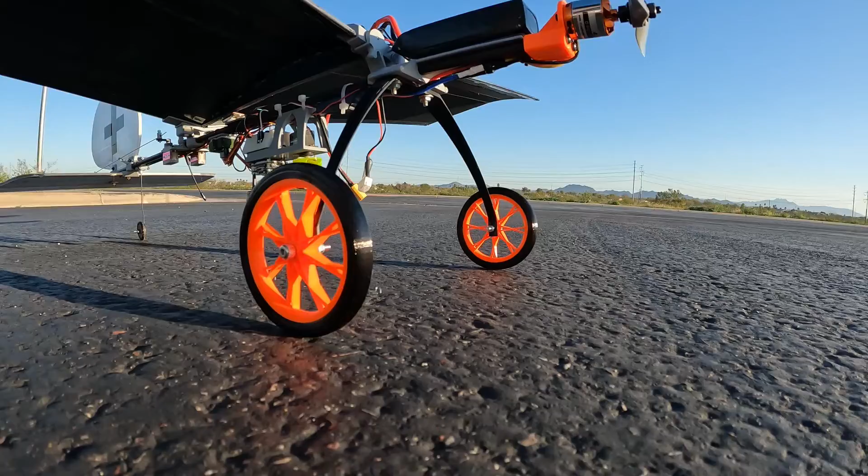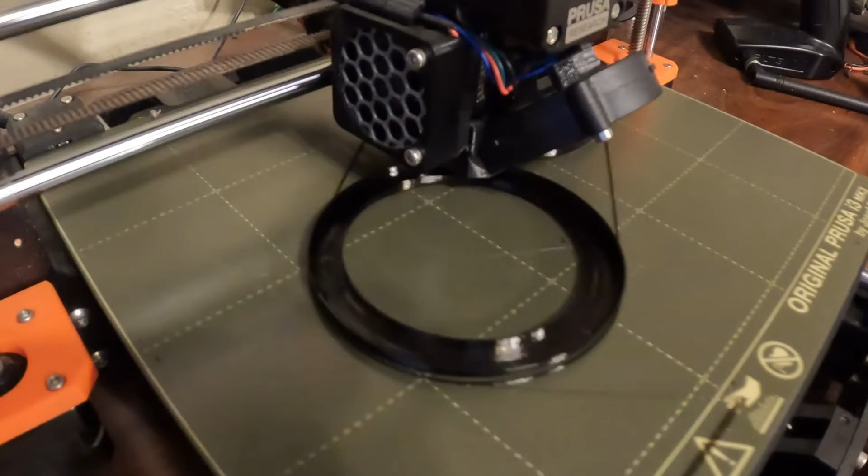Hello, David here. Today I'm going to show you how I designed and printed these wheels that I use on the slow sticks. These are new ones. They're 90 millimeters in diameter, and this time I wanted to try some PETG, but I've been very happy with them in PLA, so you can print them in either one.

They're very durable, pretty light. So stick around as I show you through the steps in Tinkercad.

Okay, starting from Tinkercad.com, we can go in and do some design work. This is in no way sponsored by Tinkercad. It's just simply one of the tools that I really enjoy using in development for a lot of the 3D printed parts. It's very quick. I can do up shapes and 3D print them from the STL files that are generated here.

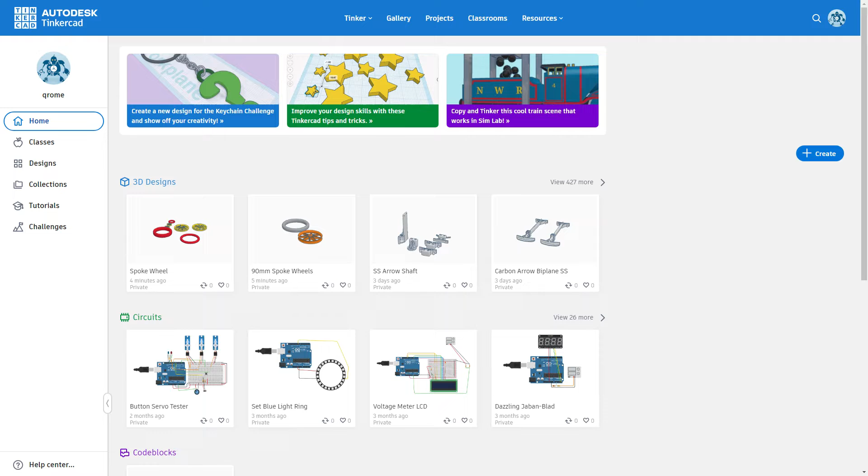And so today we're going to go under your designs, but we're going to create a new 3D design. And we will create a wheel and a tire that can be printed and used on an RC airplane.

I'm going to assume that you're fairly familiar with some of the locations of most of the stuff, and sorry if I jump to conclusions that you may already know. However, you can spend a little bit of time in here and get to know the shapes and what they are and what they do and some of their configurations.

So right here you start off with the basic shapes, and these have most of the shapes that you're going to use, and the basic concept in Tinkercad is you create a shape and you can add and subtract from it. So one of the first things we're going to do to create this wheel, we're going to start with a cylinder.

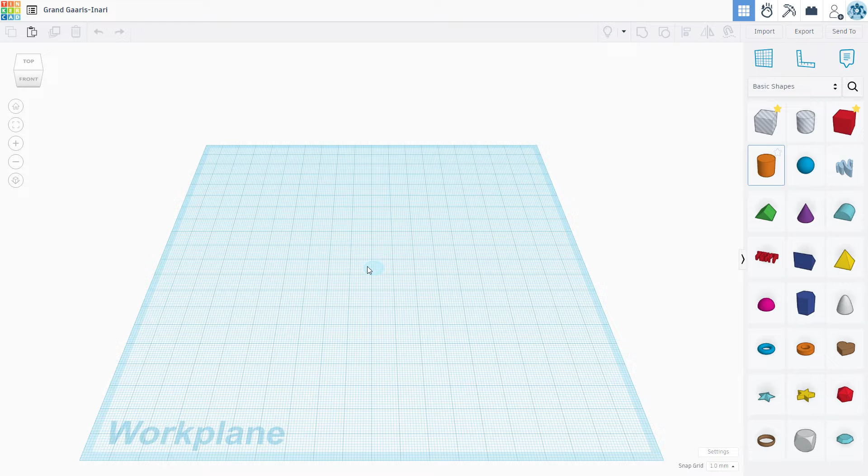I'm going to smooth out the cylinder by increasing the number of sides to the max. And then the other item I'm going to do is I'm going to add a little bevel to the top of the hub. Maybe we'll just type in here, make it 2.

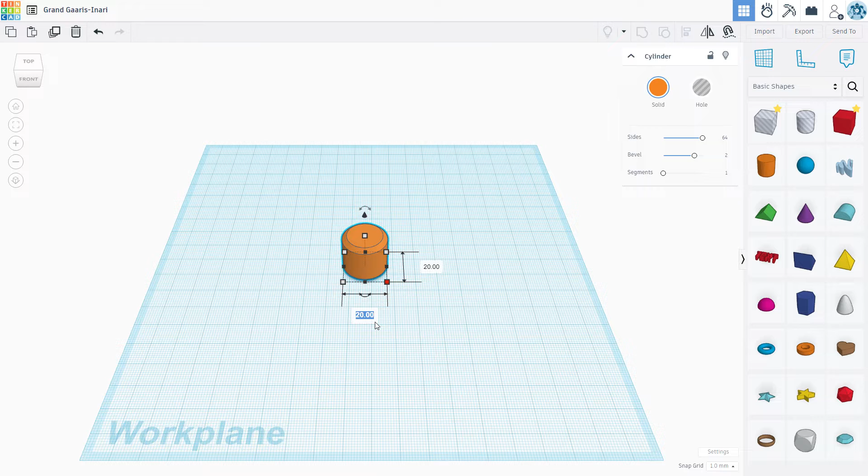And let's go ahead and make this hub maybe 20 millimeter by 20 millimeter. That'll give us a 20 millimeter hub.

That bevels it also on the bottom. And I don't want the bevel to be on the back side, and I also don't want it to be this high. We're going to cut that bottom part off above.

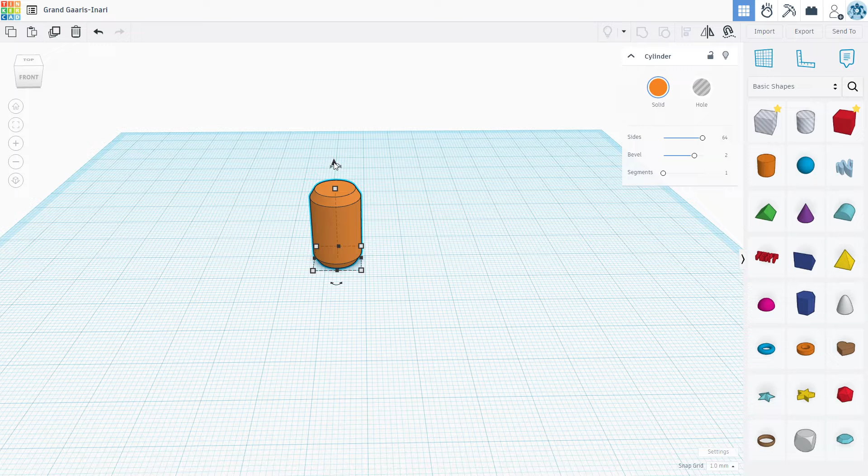So this little cone icon, and if you notice, we know that the part is 20 millimeters high, so if I put 10 millimeters below the floor, we'll use that as a guide to cut.

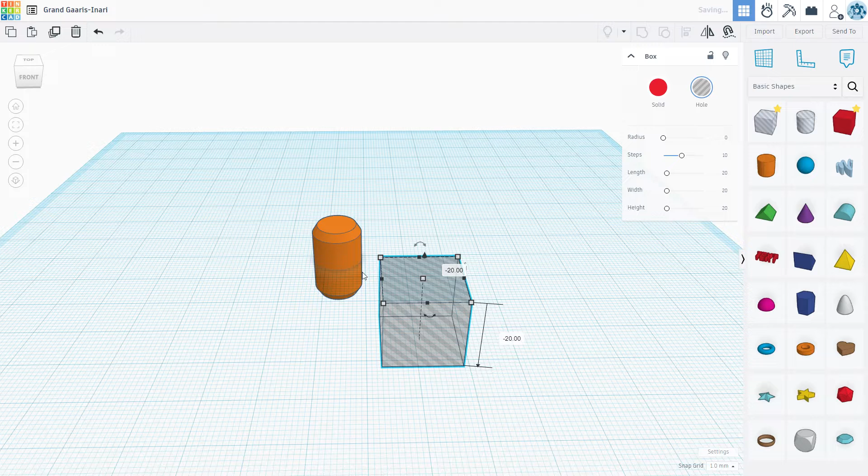And to cut that bottom part off now, I'm going to take the subtraction cube, I'm going to lower it below 20 millimeters, it's below the floor right there. And I can just set this underneath, and you notice that it encapsulates the entire bottom part of that.

And to cut that off now, I'm just going to highlight both of those parts, and you'll see right here shapes, there's a number 2 up here selected, and then I can do a join or group, and that's going to subtract the clear part from the solid part.

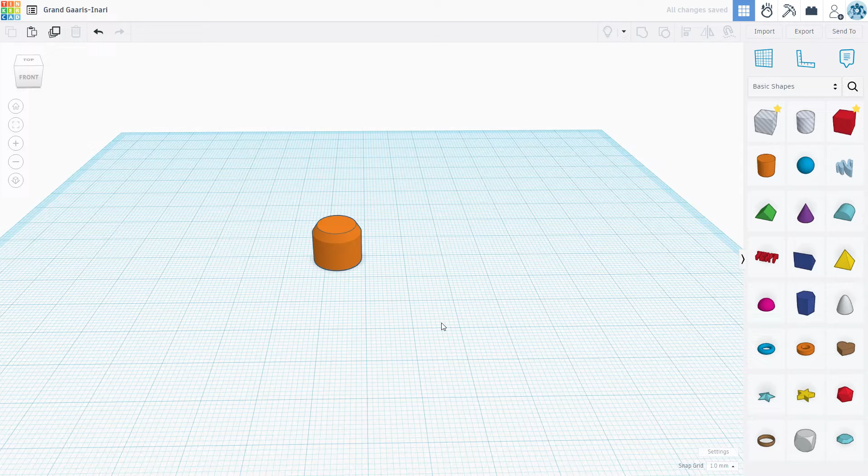So there's our hub. We need now to add an axle hole, and often I've learned that in the design I want to do, if I want a 3 millimeter axle, I need to add a 0.2 millimeter kerf or space to allow the axle to pass through.

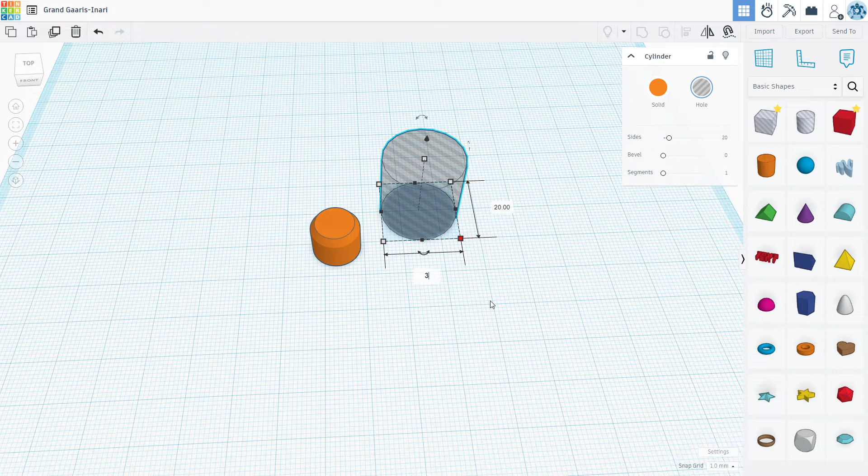Otherwise they will just be too tight. So I'm going to do 3.2 millimeter, and we need to also do the other side. And we can increase the sides as well to make it more round.

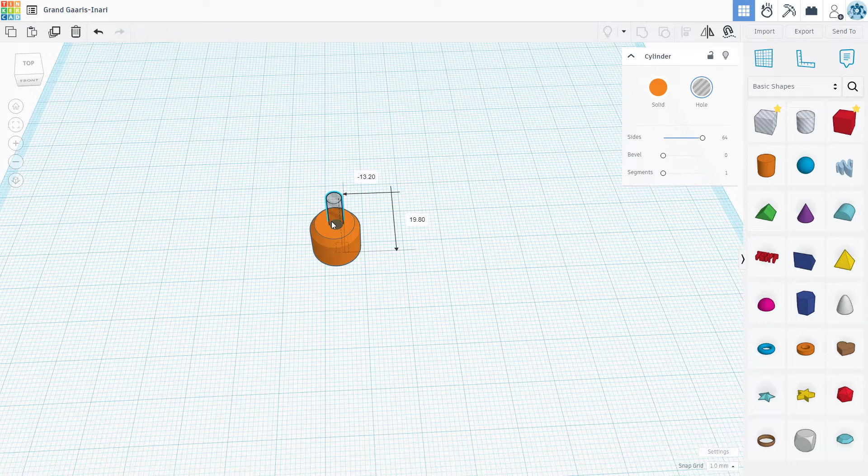Okay, at this point, one of the difficult parts in the design process is how do I make sure that I get this axle dead center. I can try to guess and move it around and spend a lot of time and try to do some math. But let me just show you, this saved me a lot of time and a lot of headache.

Is you simply just highlight, select the parts that you want to align with each other, and you notice here you've got two shapes selected. This right here is the align tool. So I'm going to select it, and it's automatically going to give us some indicators of what and how we can align this. And you can just start aligning it right now.

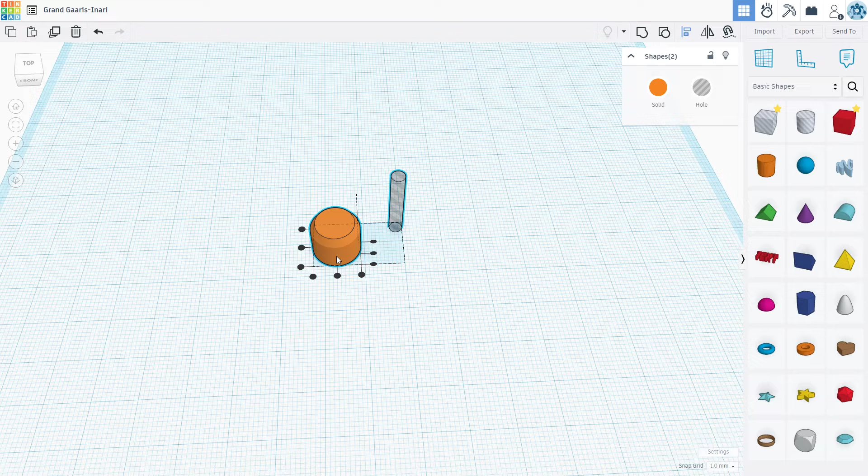However, I want this piece to stay stationary, and there's usually times where you don't want one piece to move or the other piece to move. Now I can align in this axis, X and Y, and you can also align in the Z axis as well.

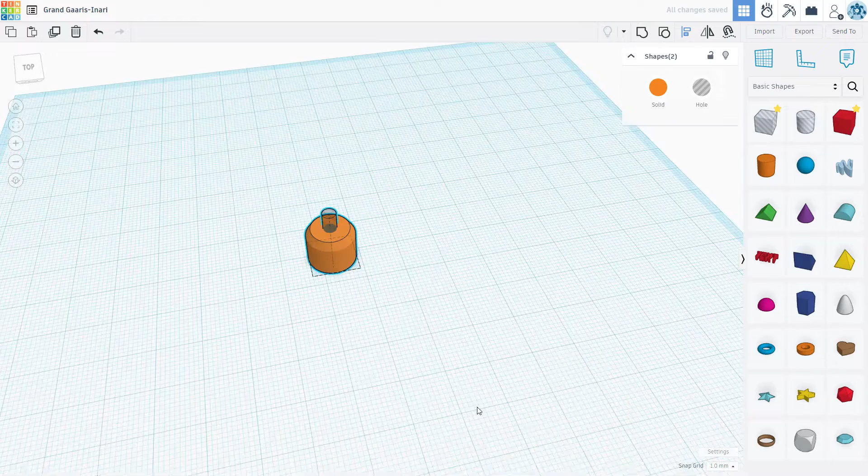So now if we look at this, we've got that axle hole perfectly centered. I'm going to leave them like this, but they are aligned.

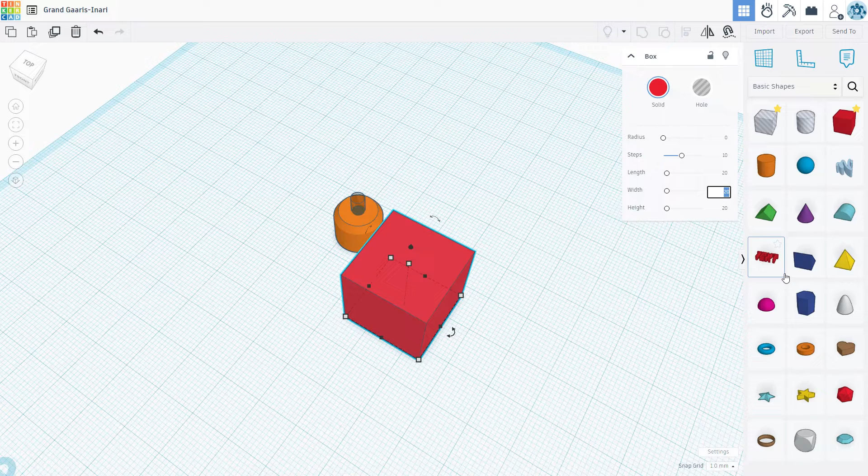Now the next thing I would do is let's add some spokes to this, and there's several ways you can pick from your shapes over here. You can get creative. So from here, I just dragged out a cube, and these cubes default to 20 by 20 by 20.

But we're going to make it 0.8 millimeters wide. That's on my printer - 0.8 would give you 2 passes, that's 2 wall thick. We know the hub is 1 centimeter high, 10 millimeters, so let's adjust the spokes to be about that same.

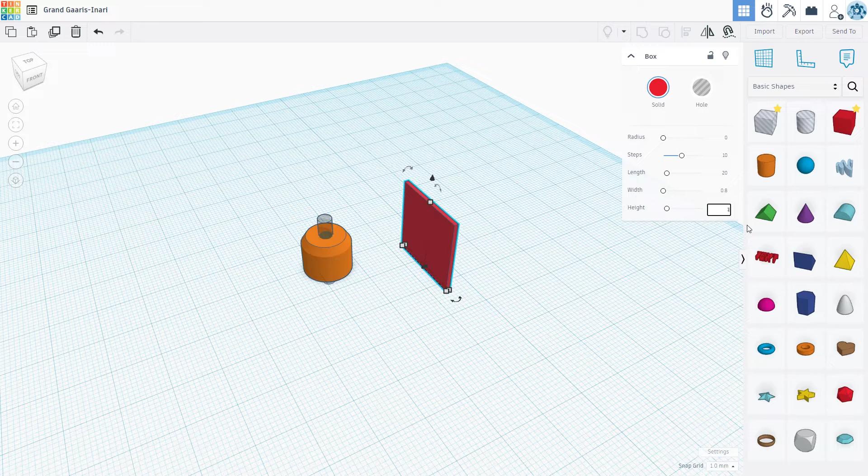Let's do the length of it, 35. Some of this will get trimmed, and that's fine.

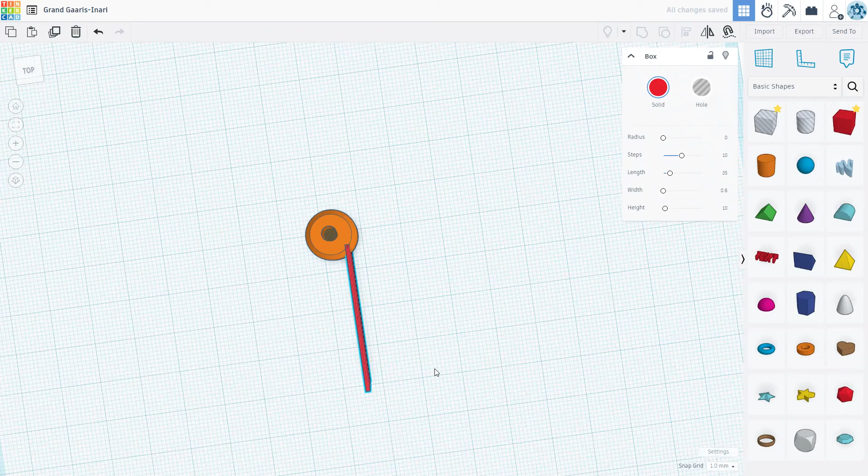I'm going to lay this in here, and it's off-centered. We'll go over that a little bit, but you'll see why in a second. One of the things I pay attention to is that all the corners are dug in - there's nothing poking out in the bevel. That looks pretty good.

That's great. One of the other tools here, so I've created one spoke. Up here on the left, there's a duplicate or repeat, and so I'm going to duplicate another spoke, and it lays it immediately over it, and it highlights it, and it's ready to move.

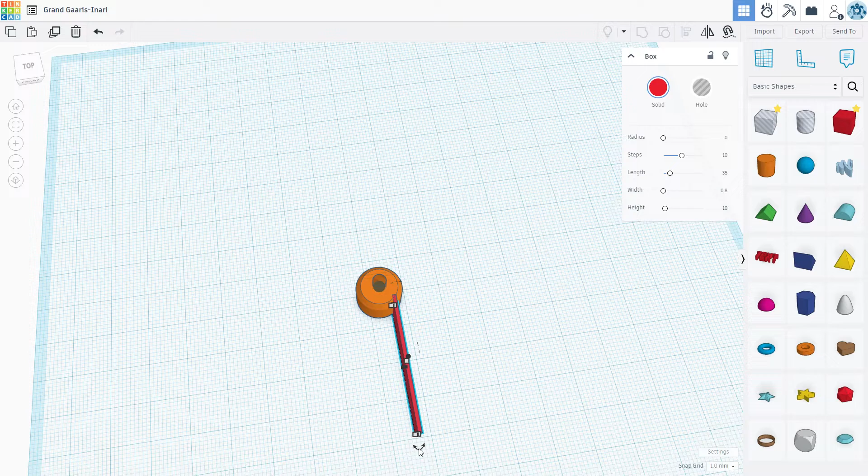And I'm going to just go ahead and rotate this. Let's go rotate it. I think the corners are each in. Okay.

So there we go, we got the spokes. Now we need to duplicate these.

What I typically do is I highlight each one. I'm holding down Shift, and I'm clicking on each one. So now we know we have 2 shapes selected.

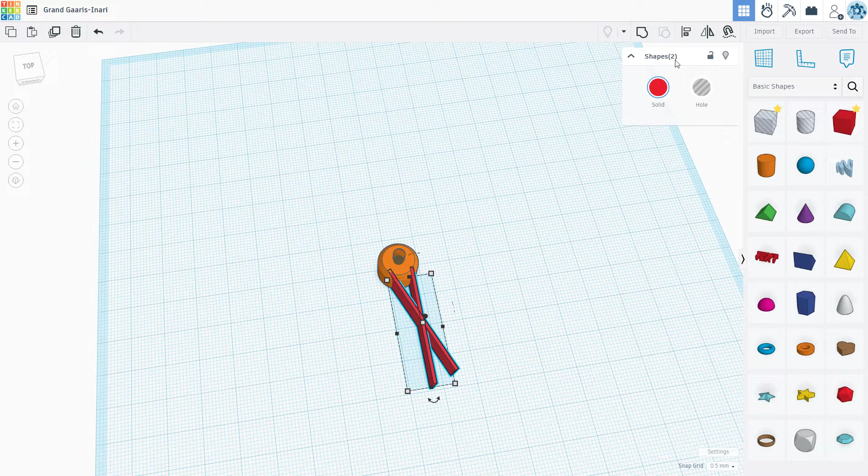At this point, you can group them, and we're going to duplicate it. So it made a duplicate of those 2 together.

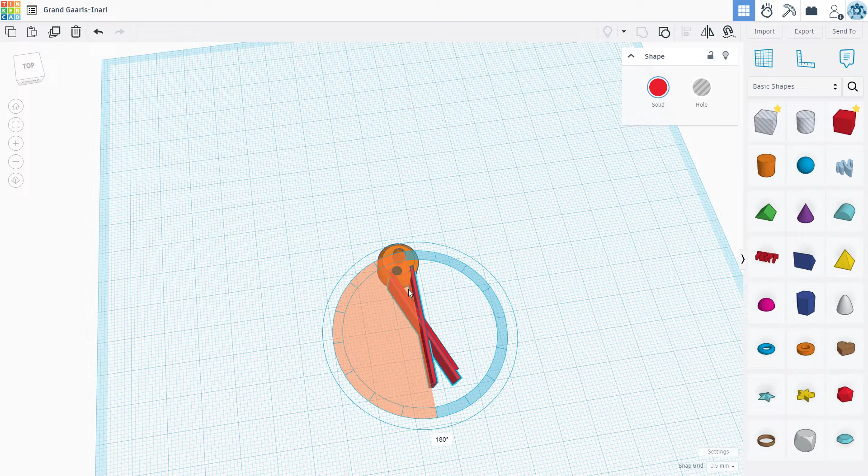Now let's rotate them 180 degrees. So that's 180. And I'm going to move them up to the other side, and we can just kind of visually get them close to where we want them.

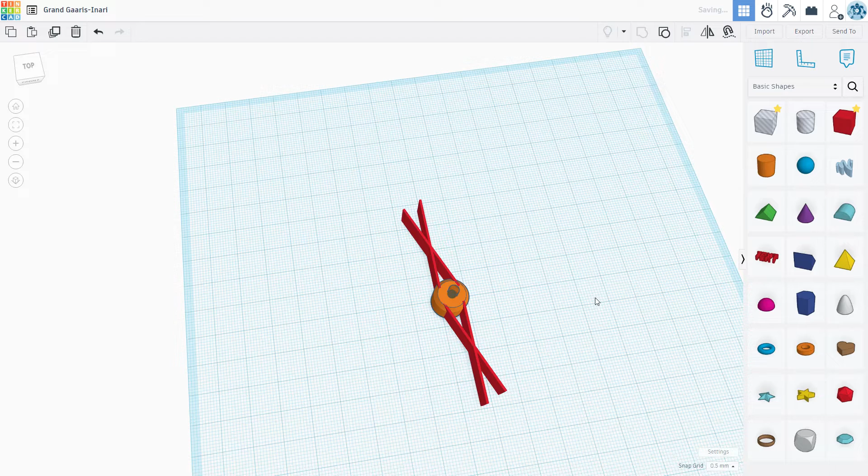Let's group these first, and then we'll align them. You'll see why this doesn't have to be exact here in a minute.

So we've grouped just the spokes, the red parts. Now they've become one part. Now we've got 2 parts selected because I just selected the hub.

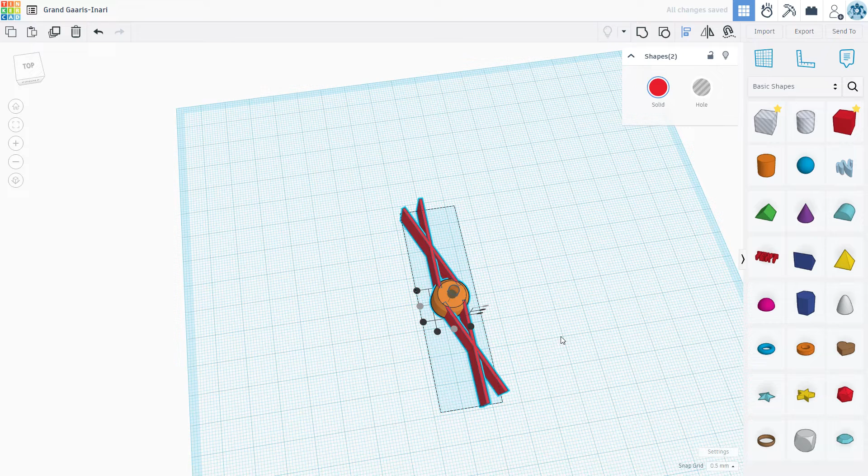And then I'm going to align all of those centered based on the hub. We'll center it this way and center it X and Y. So now they should be equal to each other on each side.

We want to just select those spokes again, and we're going to repeat these around in the circle. And if we don't move them and slide them around, they should just rotate in place. So I've duplicated, and now I'm going to rotate the part that I just duplicated.

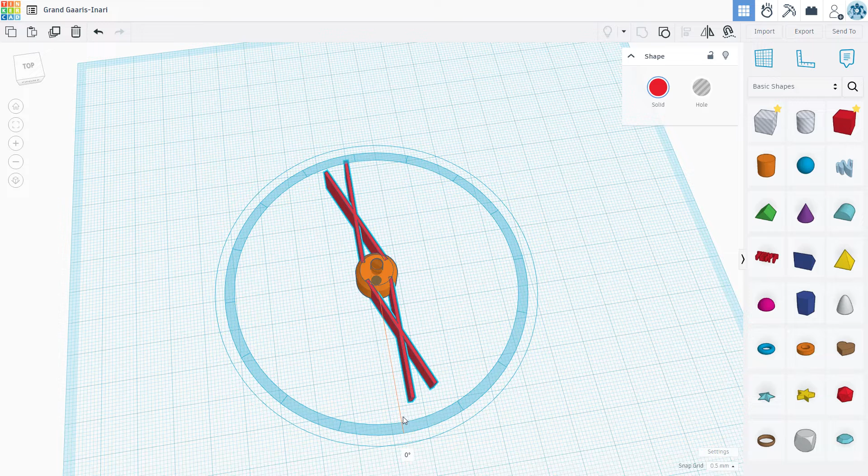Let's do it 20, let's do 45 degrees. Okay, there we go.

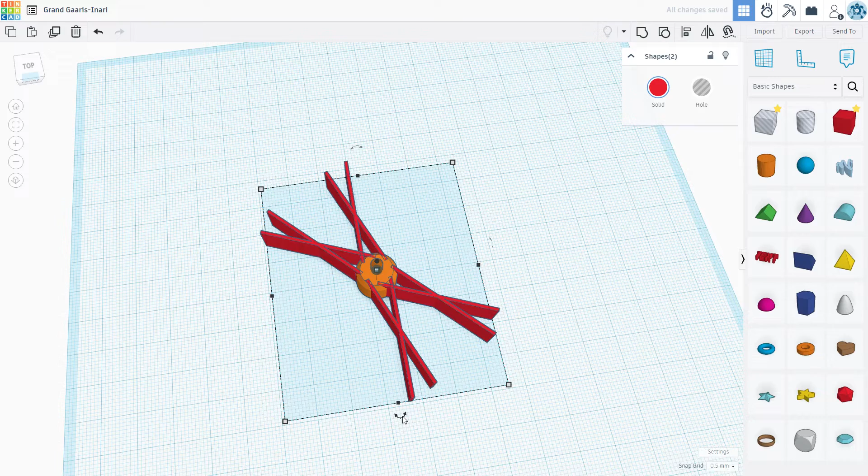45 degrees. Let's select these 2 parts now and replicate them. We've got 2 now, and then I'm going to rotate 45 degrees right there.

Everything now is radiating and they should be identical. So the hub is not selected, but I'm going to go ahead and group those. So all the red parts now are one part.

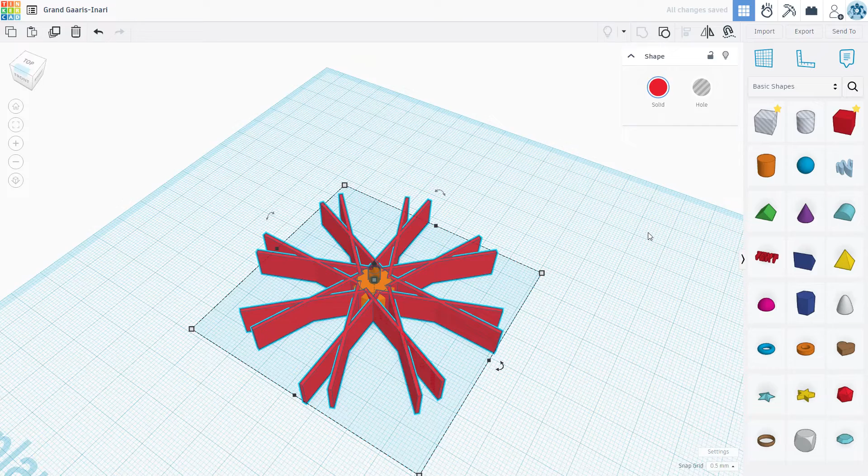What I would do here, let's go ahead and add the taper that's going to go out to the rim. I'm going to use a cone. We're going to create a negative of what we want. So as we have this highlighted, let's do the bottom 35, 36.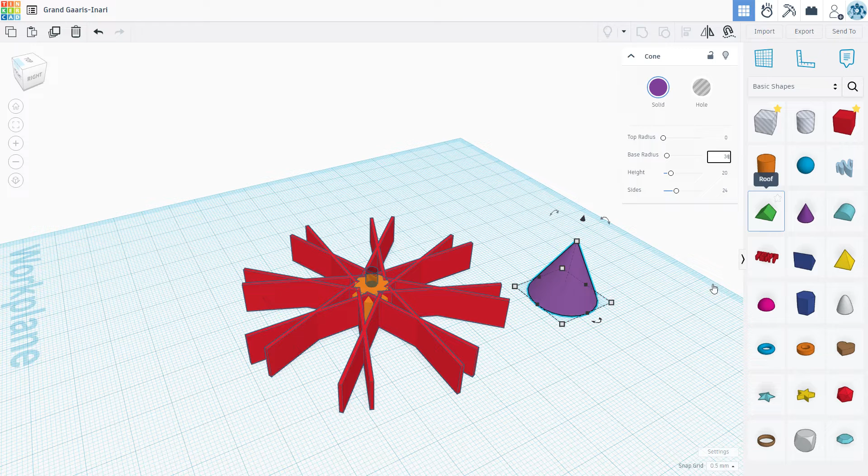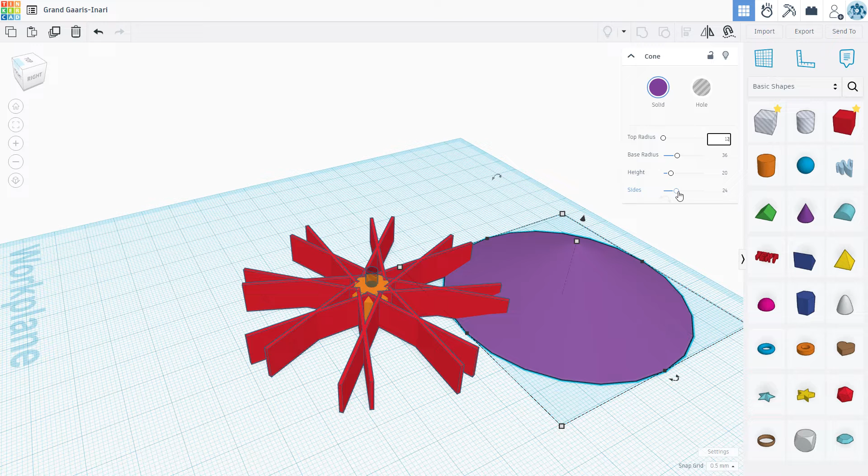In the top, we know that hub at the top was, I think, a 12 millimeter. And then we'll increase the number of sides to make it as smooth as possible. Let's do 5 millimeters. So we just created a cone.

You'll see in a minute, but it's going to be the negative. I'm going to put a square here, and this will make sense in a minute. We're going to make a piece that's going to carve the spokes. It needs to be larger than the spokes.

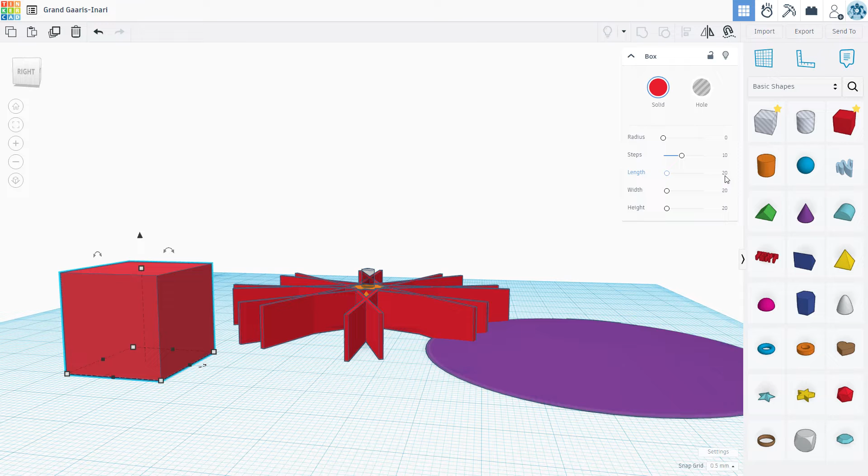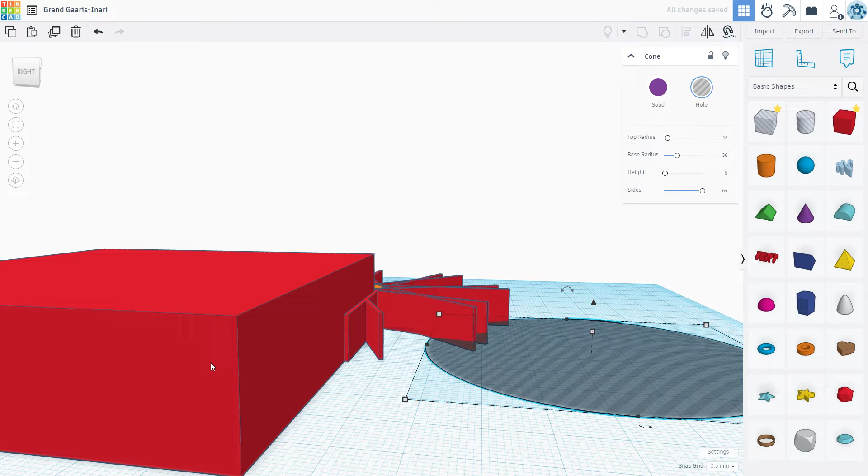So if we do 80 by 80, we can leave the height alone. Let's put this directly - we're going to make this transparent, and let's group it with the big square that we just made, and we're going to subtract it from the large square.

So we should have two things selected. We're going to group, align those so it's dead center of this square one. So now we have subtracted that cone.

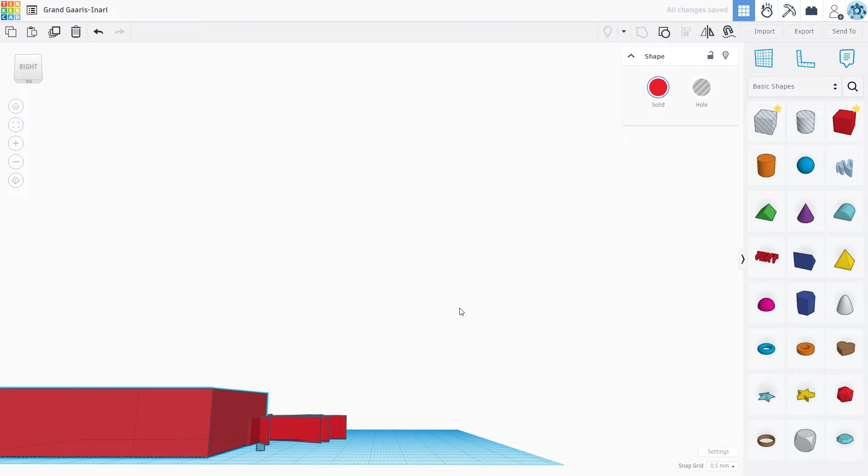We've subtracted that cone from this big square, and now we can use that to taper the spokes. I know this seems a little weird, but now we've made that transparent, but it still has the cone in there. Let's raise this off the ground 5 millimeters.

Now we're going to use this just to only taper the red parts, the spokes, and not the hub. We want the hub to stay the same. So I've highlighted both parts.

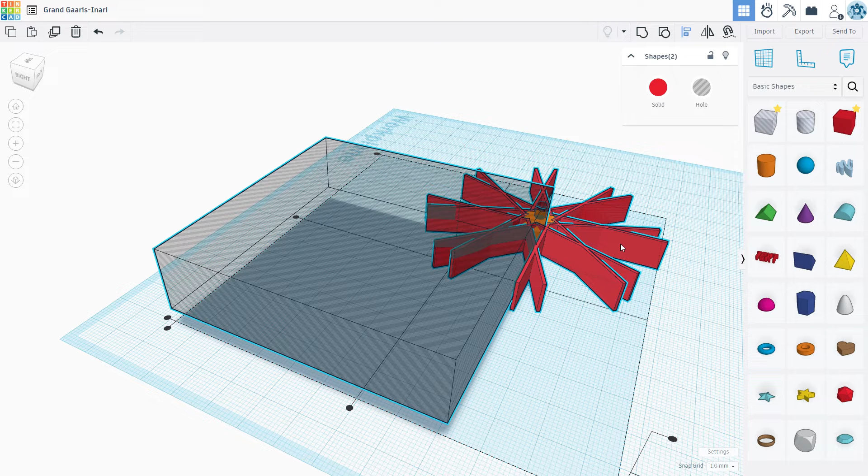We have two parts selected - that's the spokes and the subtraction that we're going to do for the taper. And we're going to align those, and we're going to align them to the spokes.

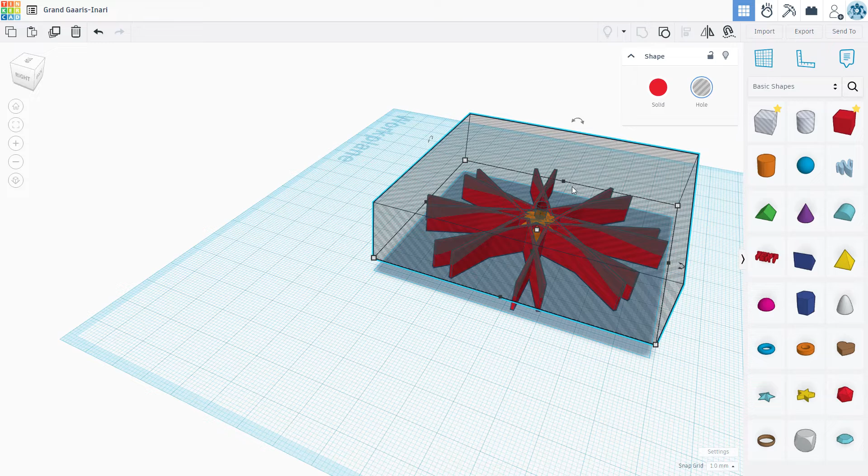Okay, these dark areas, you can see that's where it's going to subtract. And we could probably subtract a little bit more. It's not even subtracting up here near the center. We'll do that by selecting the one part, which is the subtraction part, and lowering that down. We lowered it 1 millimeter, and look, it's covering all of that. So it's going to taper it down like that.

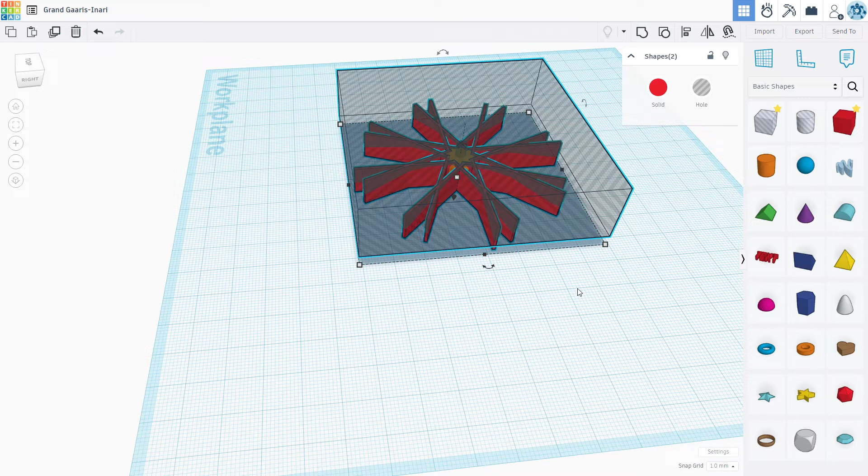So let's go ahead and select the two parts and group those.

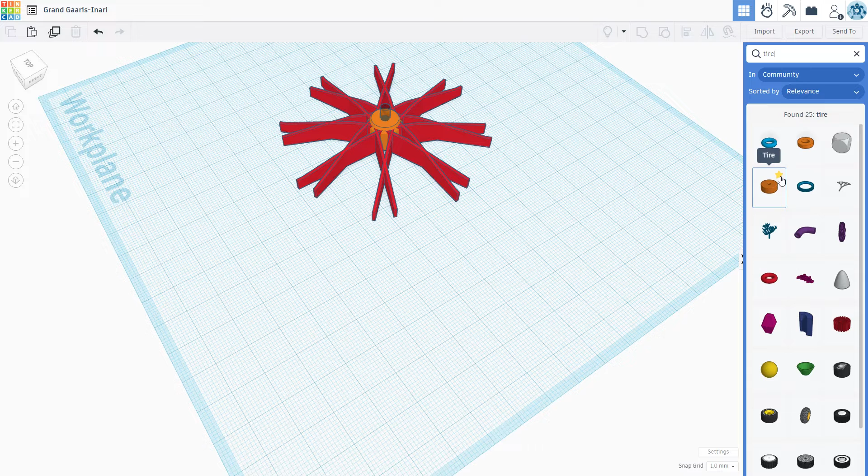So in here you'll see there's a lot of other generated shapes and things that get you started. There's design starters, so if you go into the design starters and just do a search for wheel or tire, there's somebody's created ones you can star and favorite so they show up in your favorite list. I like this one right here because it's pretty easy to use, and you can define a lot of characteristics you want right over here.

We know we want the inner part of that hub to probably be - what's the diameter across? Let's do 70.

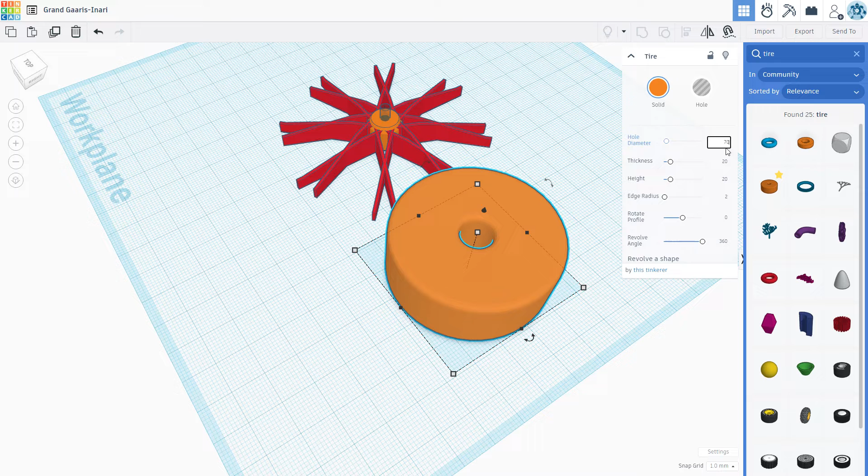And let's move it over here, give us an idea - we'll center that in a minute. The thickness of this, let's do 10 millimeters, same size as the hub. And then the height, we'll do the same, 10. And the radius, edge radius, if we take this to a 5, it'll make it completely round on the inside. So we can try that.

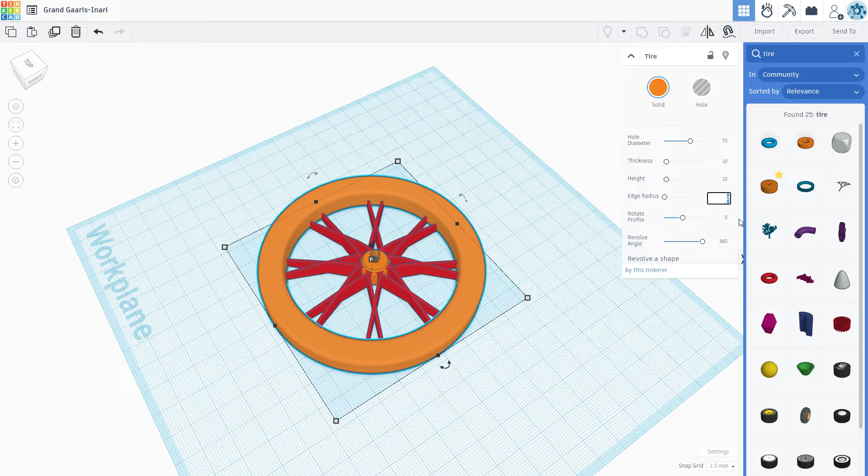So you have the rim selected, and then select the spokes, and we're going to center them on each other. It's important that you don't move all the other parts either - the center hub - so that everything stays in alignment. Okay, those should be in alignment.

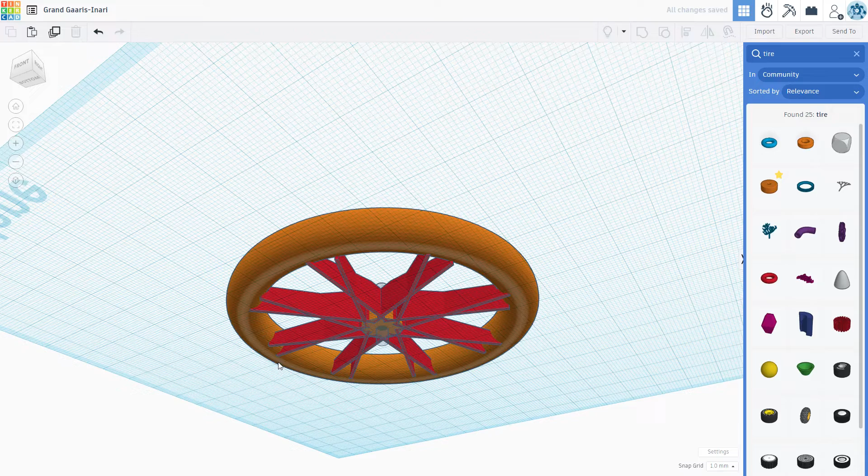Now we want to check the bottom, make sure everything digs into the... see, and that one does not. So what we need to do is make that radius a little smaller, or the diameter of the tire. Let's take the hole diameter to 65 and see what that does for us.

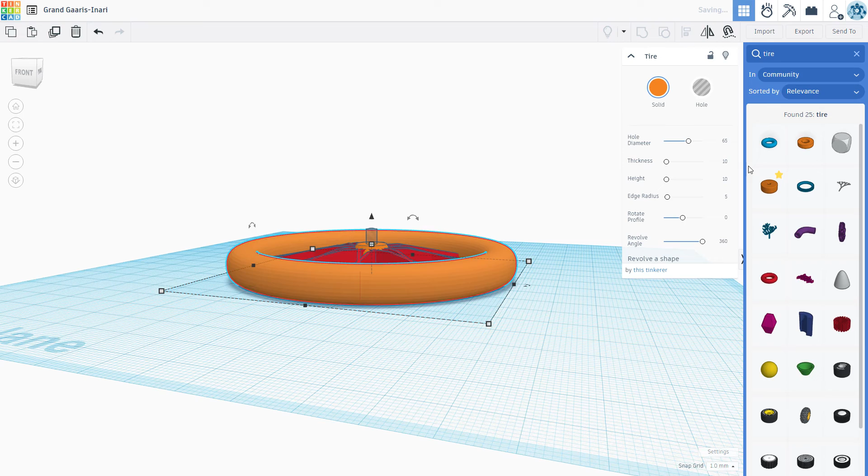You shouldn't have to recenter on changing the parts on those tires. So we see it go in completely there and completely there. And it's okay if they go a little bit further in - I'll show you why, because when we do the final join, it'll take care of that.

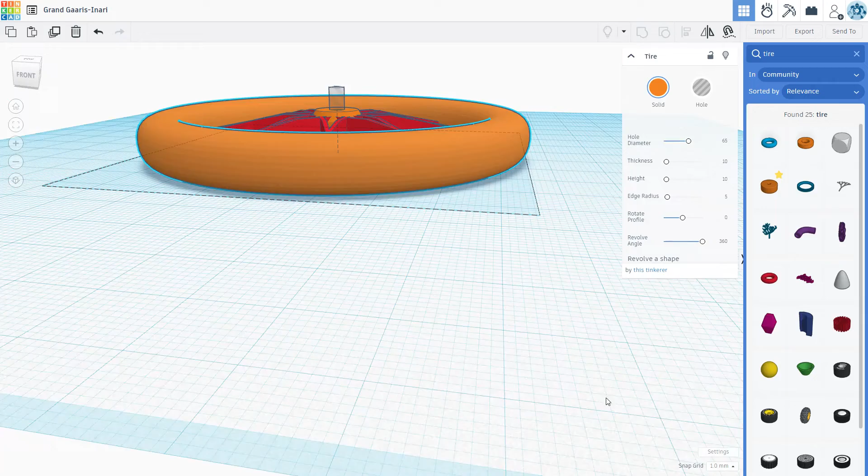So we're going to replicate the rim, that shape, and let's make it a different color so that we can differentiate the two. I'm going to go ahead and make the tire this gray here.

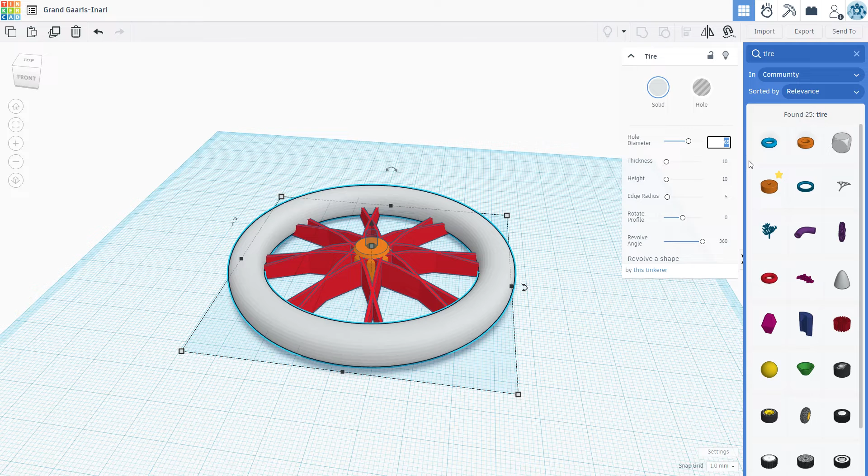Now let's modify the gray part. If we want the rim to have a little bit of thickness, maybe 2 to 3 millimeters on the inside of that rim, we need to add double that. So we're going to take it up to 71 millimeters on that diameter, and you'll see here why.

Okay, so that's the tire. And one of the things I like is if we can get this tire to hang over the rim about 1 millimeter on the inside and the outside, that would be great. So that means if we have a 10 millimeter tire, let's take it to 12, and then we're going to drop it 1 millimeter. We're going to make a tire, and then we're going to subtract it from this rim, and I'm going to lower it 1 millimeter. That'll put 1 millimeter above the rim and 1 millimeter below it.

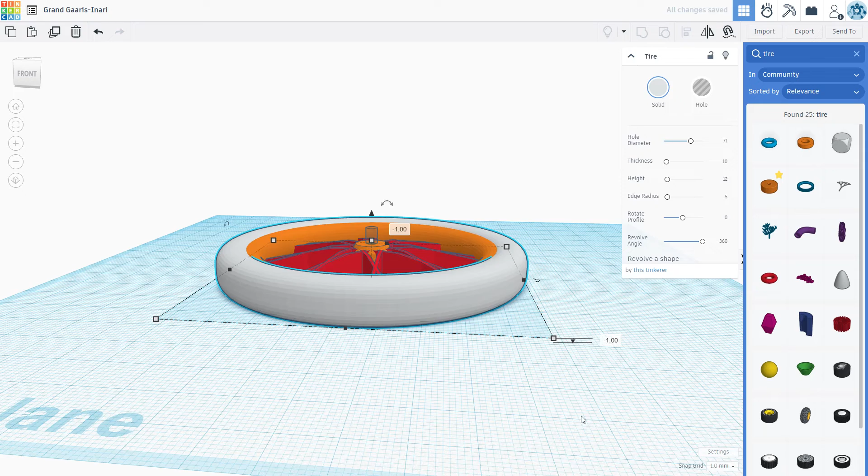And we're just doing that for the subtraction purpose right here. Okay, 1 millimeter drop. At this point, we want to duplicate this tire and save a copy of it that's going to be the real tire. So I hit replicate, and I'm just going to drag the duplicate off.

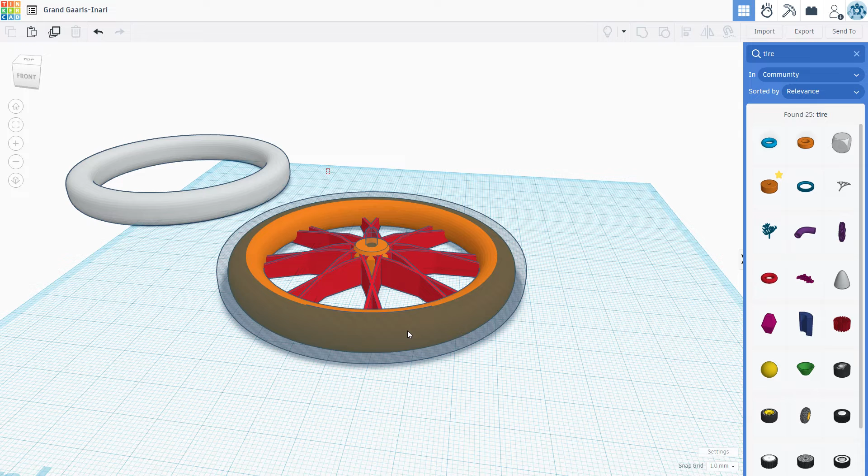Now we need to subtract this from the rim. So at this point, we have all the parts and everything we need. We should just be able to drag over the whole thing, highlight it - don't get the tire in this, but we should have all the parts. And this is 5 shapes, and we'll go ahead and group them. And this is going to make our rim.

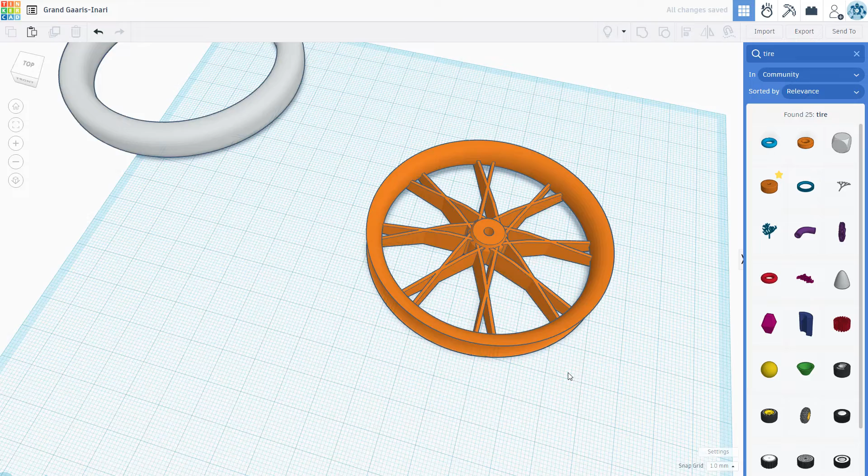And at this point, the rim should be ready to 3D print. I know it looks delicate, but it keeps it light, and I like a little bit of visibility through the tire, through the rims when I'm flying FPV.

Now we need to remember the tire that we saved off. Let's go ahead and raise it up so it's not below deck, 1 millimeter, it's on the deck. Now one of the things I think is kind of important is to add that kerf, because if you print this in TPU and it's exactly the same size as the rim, it's going to be really hard to get on sometimes. It's okay if it's snug and there's some stretch in the TPU, but if we go 71.2 millimeters added to the inner diameter of that tire, when we go to print that TPU, it's just going to have a little bit more ability to get over the rim to fit it on.

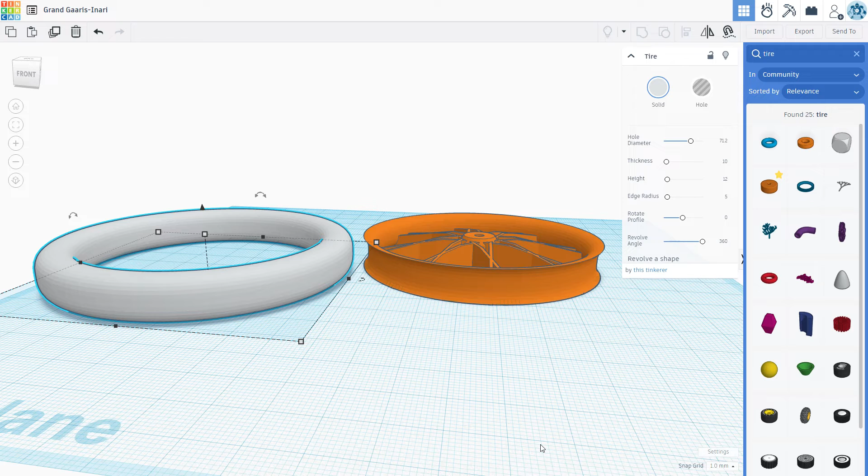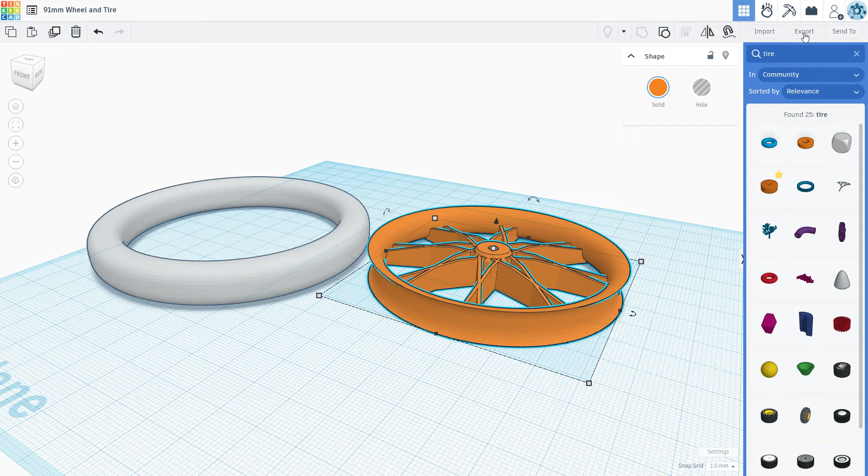At this point, we should be ready to 3D print these and give them a go. So part of what we need to do before we print it is export it. If you're new to this, you can just highlight the part, and I like to do the individual parts because you'll need to lay them out separately to slice them for the material you plan to print them in. Hit export, so we have the rim highlighted, we clicked export, and we're going to save it as an STL. And do the same thing for the tire.

In preparing these files to print, I use Prusa Slicer, but you can use Cura or anything you're comfortable with, and I'll try to make the descriptions as generic as possible. But let's prepare the wheels first.

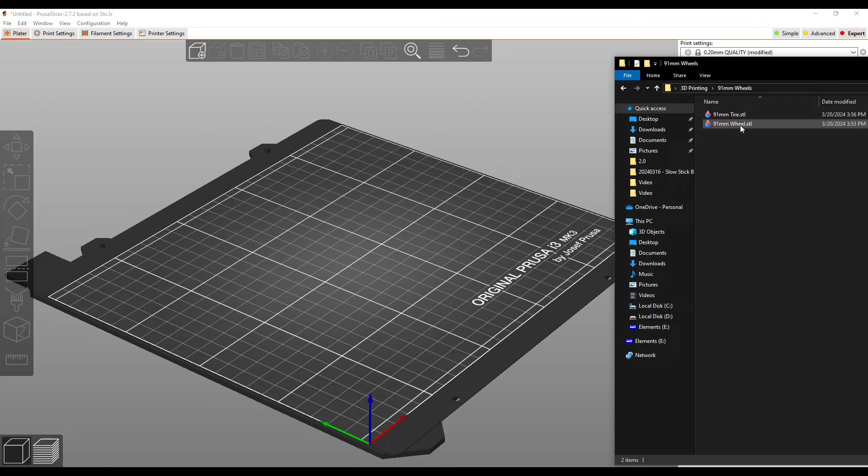So I drag one in there. We'll take a look at it, and that seems to look okay. I think these are going to be thick enough. So from here, let's go ahead and duplicate that on the bed.

We've got them laid out. The infill is not a big deal here because the only part that's really going to get any infill is the hub. You can do 30 or 40. What I do is I often put the perimeters — this is the number of layers that are around the outside edge and the perimeter — I bump that to 3. Prusa likes to default to 2. I also bump up the solid layers on the top and the bottom a little bit.

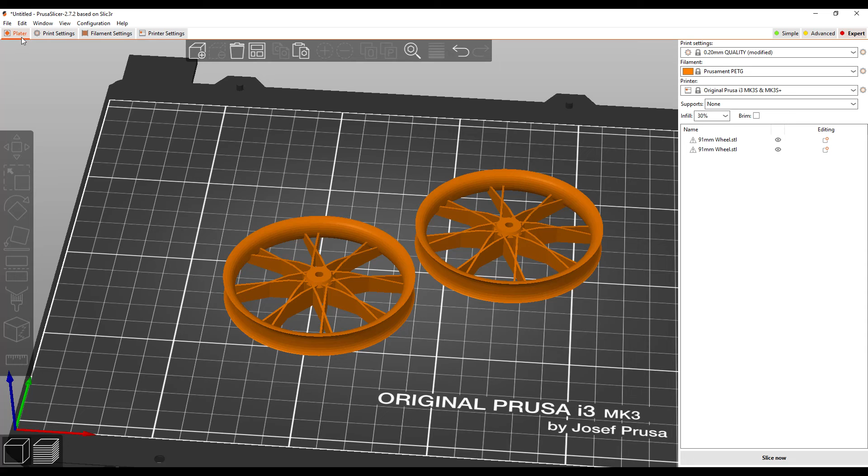And then we'll go ahead and select the Prusa PETG, which I'm using, Prusament. And let's go ahead and slice this and see what it gives us. And we'll look at the layers real quick.

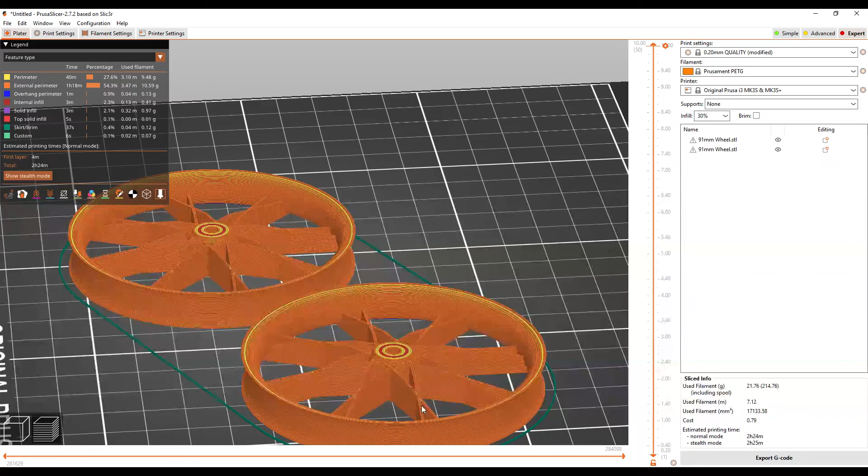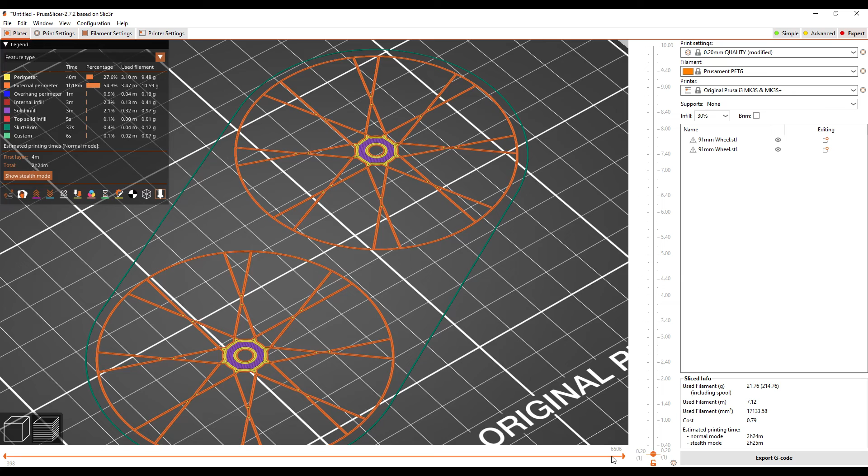So, wow, that's going to be some thin. Yeah, we got two layers per spoke, which is pretty thin, but they're going to be light. But those shapes and those triangles, they really are pretty strong, and it'll be interesting to see. So we can look down the layers, we can see what it'll look like as we go down. The hub will have some infill in it. And there's the bottom, so that's the first layer. It gets 2 layers around on the base, and then it builds it up.

Let's go ahead and export this to the G-code. Just put it somewhere, I'm just going to put it on my desktop. So I throw a tire on here.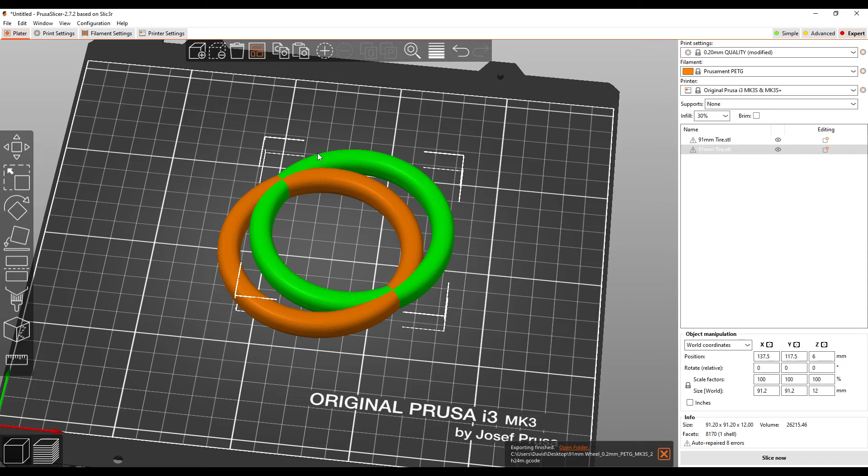Okay, let's copy that and duplicate so we can get 2 of them. And let's just arrange them on here, probably about in the same way.

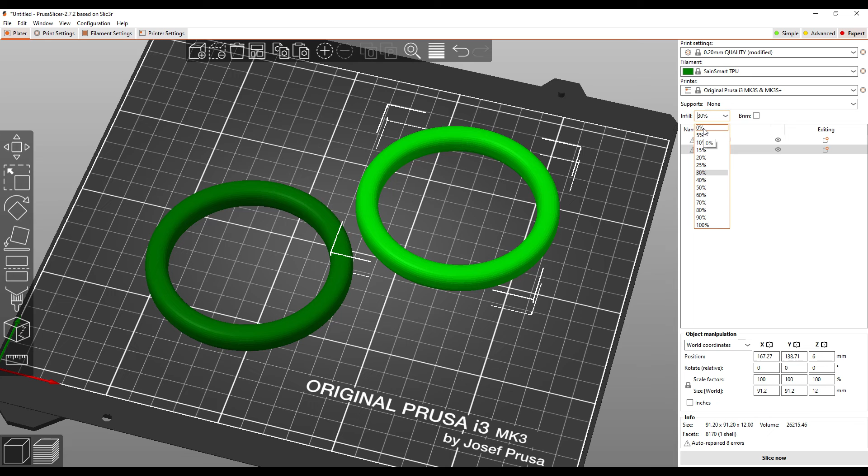When you're printing the tire, you want to use the flexible filament. For my printer and the material that I use, the SainSmart TPU profile is probably the best right now for me, so I'll select that. We also want to put the infill to 0. These are going to be hollow tires, they're a real tire. And the number of perimeter walls, let's bump that down to 2. That'll make them nice and flexible and light.

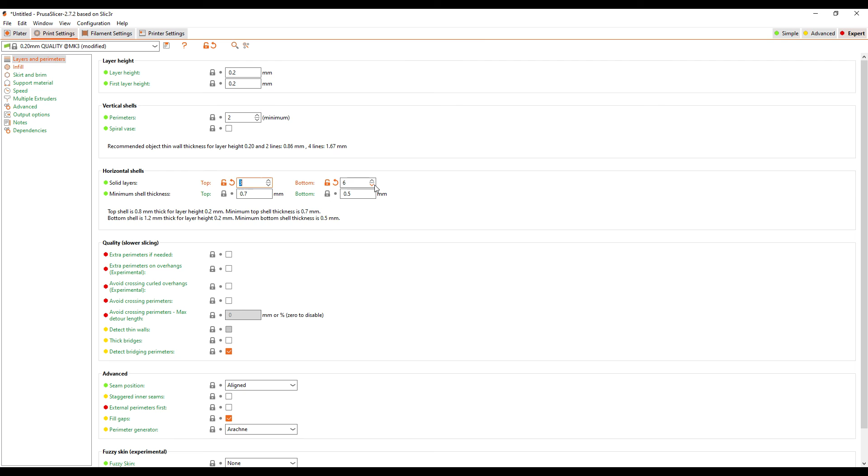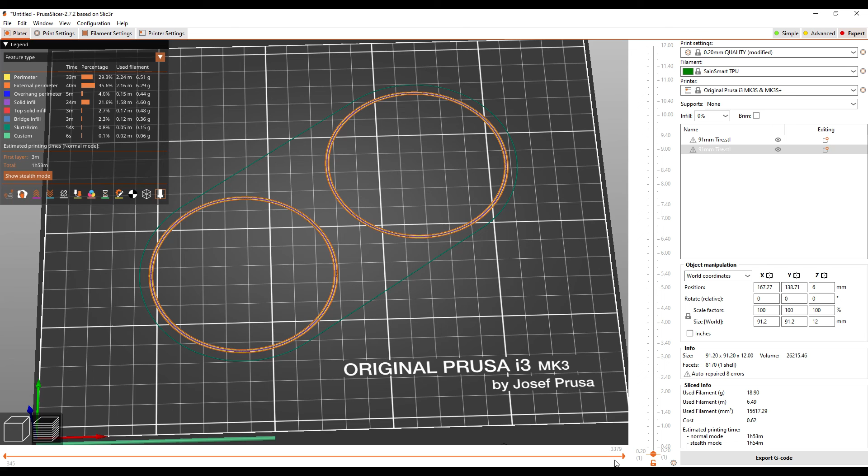Let's go ahead and export that. And that's for Flex Filament TPU, and we'll go ahead and put that on the desktop as well. From there, just take them to your SD card or to your Octoprint and print them separately for each of the filaments, and we'll go from there.